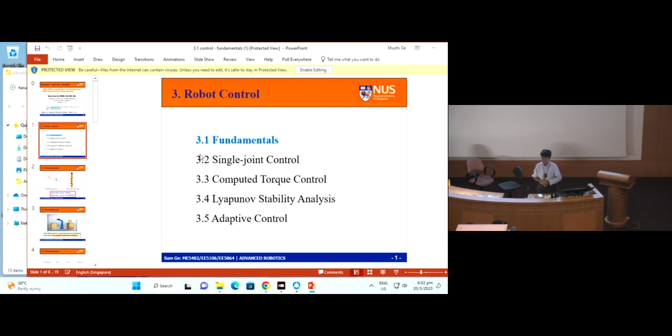Today we shall continue with what we left last week. We will do the control part, robot control. Before we move to control, I want to give you a quick review, a mental refresh for the dynamics part. For dynamics, we did a review for kinematics, then after that we did a Newton-Euler formulation, and subsequently we talked about the Newton-Lagrange formulation. Then we gave you a tutorial. After that, we understand the Newton-Euler and Lagrange formulations are actually quite complicated.

Then we give you the neural network modeling. And now for the control, I give you the fundamentals. Subsequently, we share with you the single joint, which you would imagine would be easier, right? And then we will talk about computed torque, Lyapunov stability analysis, adaptive control method for multiple joints. For the fundamentals, this is the Puma with 6 degree of freedom, and this Kuka with 7 degree of freedom. For the kinematics part, the path planning, which you found quite tedious.

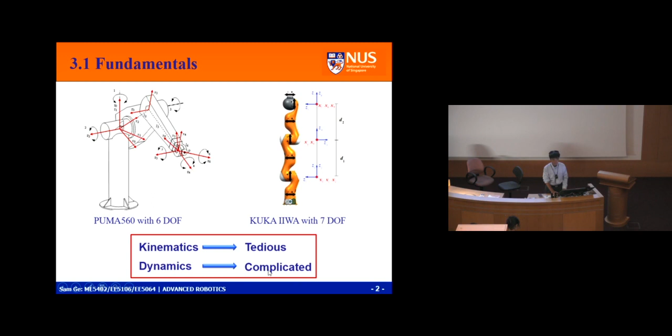The dynamics is actually complicated. We will see how we can actually control with the knowledge of kinematics and dynamics, and how we can control the robot in accordance with certain prescribed performance criteria. You want your system to perform in the way you want it.

You know that ChatGPT is really in fashion now. ChatGPT, some part is very good, some part is unpredictable. So here, for this robot, this is hardware, better be safe. The ChatGPT, if the guy talks nonsense, it still doesn't hurt you, only wastes you some time, but a robot can hurt you.

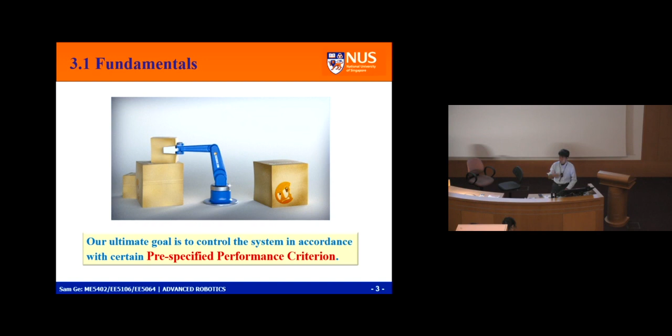So basically, this is the robot, the environment, we have sensors, and then we do the control. Sensors you would have learned in other courses. In the control part, we need to do the control for stability. We also need to do the trajectory planning. Kinematics did some trajectory planning for you, but in the computer, you need to include all these parts.

So in the computer, you basically need to do all this.

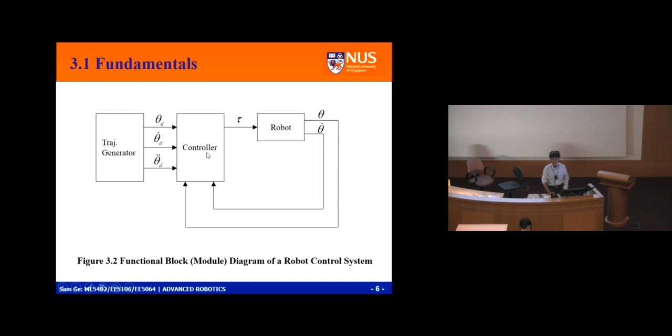I'll share with you the different controls, and then our techniques. This is the robot which gives you the position, velocity, and then with the feedback from the sensor, the controller, based on the trajectory generated theta d, theta d dot, theta d double dot, you can do the control design. When you say controller, you say PID, adaptive, or Lyapunov. In fact, you can enlarge and be more abstract with fuzzy logic, neural network control, and then you can take it as decision making.

Then we talk about stability. I give you first this mass spring system with a damper. We introduce the stability; this is the model.

Hello, I said it's my time to talk. If you continue to talk, better leave the room. Is it my time to talk? Can I talk now? Thank you. I respect you, you better respect me, respect your classmates. When you are talking, your classmates cannot hear me. Can you say sorry? How about you? Thank you.

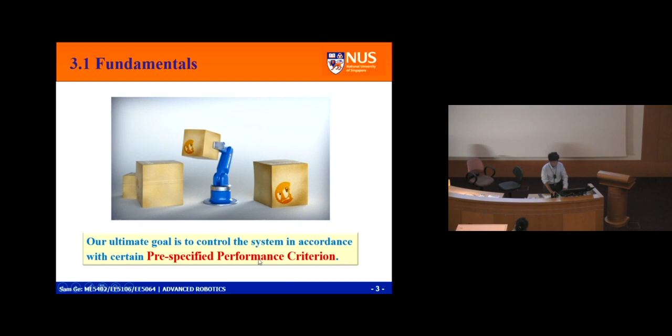The most basic criterion in designing a control system is to ensure that the resulting closed-loop system is stable. I have many people working on control with me, and I said yes, this stability is important. As in a classroom, when I'm talking, I really want a stable environment so that people can really listen to me. But then after stability, my whole purpose is not just for stability; after stable, then we go for performance. I really want you to go shine, unleash your potential, be the product of NUS.

Okay, so earlier I said here is performance; after stability, then you go for performance. Subsequently, here you learn the prerequisite. When a system is given to you as s squared plus a1 s plus a naught equals 0, the poles of the system are given by this, and this is actually an imaginary number, right? Could be, and then so you have this imaginary.

If the pole's solution is on the imaginary axis, the system is oscillatory. Because it doesn't consume or generate energy, it just oscillates. For a mechanical system, think of a mechanical clock vibrating. For electrical, you have an LC circuit, with no resistance. When you add resistance, you have damping, you consume energy, and the system becomes stable. And of course, if you keep pumping energy into it, the system becomes unstable.

If you're really serious about stability, you need to study far more than this, because for this course, I'm only covering it for robots. I just give you the basic definition, okay?

And then for this stability, subsequently for the robot, I want to consider performance, and I include this as my force. I want to control my robot. So this is the force. How do I control it?

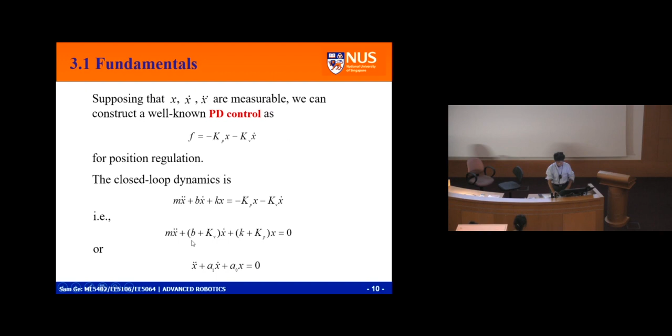For this one, the same idea applies - you convert it to something simple. Here you still use KP, KV, but this is not systematic - it changes, because for different M you need different KV, KP values. But when you come to here, after I design alpha, beta, the system becomes this, and my PID, PD control becomes much simpler.

So this is the system, and then I use alpha, beta to transform the system into a double integrator system. This part becomes this one.

For the ECE students, you know circuits, interfaces and impedance, input-output impedance - you can see this as a circuit. You look at the circuit from this part, then you have F and X dot. Then I add this part of the circuit as a bridge, and I see the circuit as X double dot equals U. For a mechanical system, you can look at it from a system point of view and do the same thing.

We were having dinner and talking. Even though she was in law and I was in engineering, we really had a good evening - we discussed everything and understood each other. Because within an individual domain it becomes domain knowledge, but when you elevate it to a higher level of abstraction, they're all the same. Do you follow me? Okay, good.

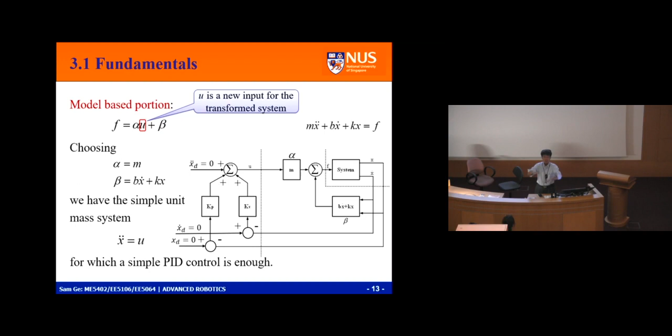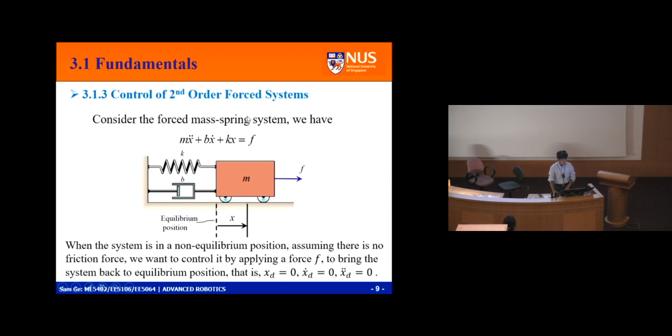So for the system x double dot equals u, I can assume u equals minus kv x dot minus kp x. This you already know, we did PD control earlier. Here, because the system is a unit mass system, my choice of kv, kp would be independent of system parameters.

This is the beauty of PD control, but in life there's no free lunch. Your controller is independent of system parameters, so somewhere it must have used system parameters.

Agree? You are so close to me, you are my buddies, okay? So somewhere it must have used system parameters. Where do we use them?

We use the transformation. This is system parameters, alpha, and also the beta, bx. We hide the complexity inside.

I work with many students - if you are Singaporean kids you learn this too. When you develop software, if you write a sequential long code, you would bury yourself. So theoretically, you need to wrap things up to make it simple.

For a complex system, I use this alpha, beta transformation to hide the complexity. Do you follow me? It becomes a module. Yuxiang, you got it? I hide the complexity because you are doing research with me.

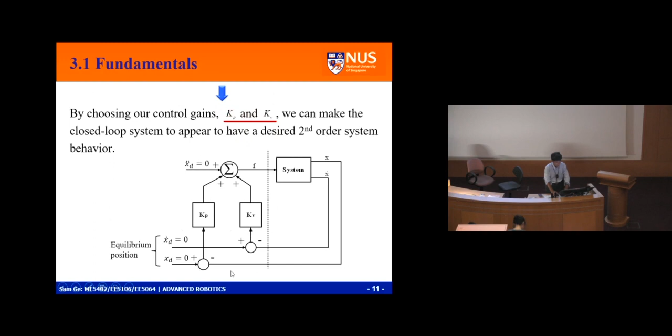For this equation, earlier you used x, now this is E, it's the same. You can still see you've got this part - x, using E, they are the same.

Now the system becomes this. So this is for trajectory tracking - xd dot, xd double dot is now equal to zero. Okay, and this is trajectory control.

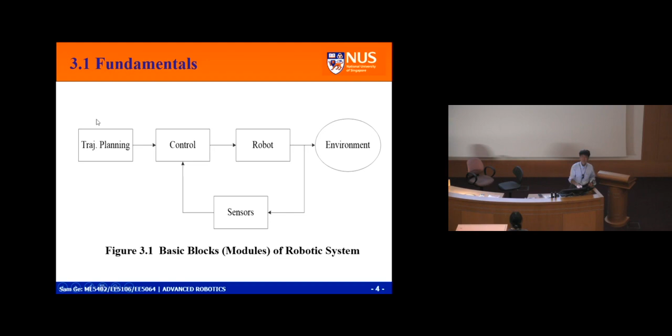That's why earlier I was saying for computer control, you need to include these two parts in your computer. This part is from me, this part is from Chu Chi Kang. So this part will all be digital computing, okay.

And then another one, disturbance rejection. Just now, I was teaching, my two friends were talking about disturbances. I'm sorry I use a bit strict language, okay? But then, thank you for your understanding.

You see this is the system. You have disturbances, and for your system you want to be stable, but in life you cannot be so stable, you must have disturbances. Actually I constantly disturb my students, and you move around, running around. As long as they get the job done, physically they must be healthy. So I really appreciate my students agree with me, moving around, they become more healthy.

Now, this one actually, the disturbance cannot be too big. If you have an earthquake, sorry, the earthquake is too big. The aircraft flying, but if you have a big storm, the aircraft cannot, okay?

So that's why when I'm talking, you can talk, really I cannot hear. I'm okay with you. But when your volume is too big, then disturbance, so your disturbance must be less than alpha. In the alpha, I cannot hear, your close friend can hear. I'm actually quite naughty as well.

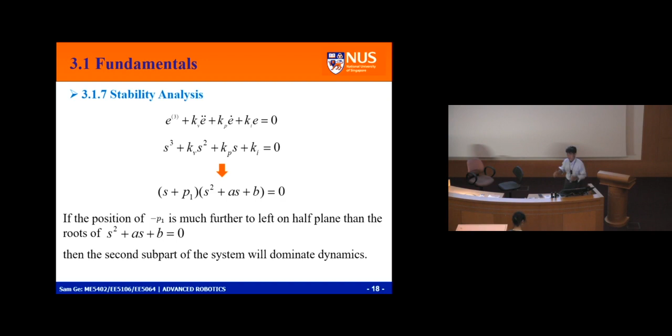One thing you're helping me with - the computing we taught in the old days needs to be revolutionized now. The textbook was written 10 or 20 years ago, based on when computing power was limited. Nowadays with so much computing power, if you go for performance, you don't care about reduced order. If your budget is limited, you can only afford a smaller system, then we do it the old way.

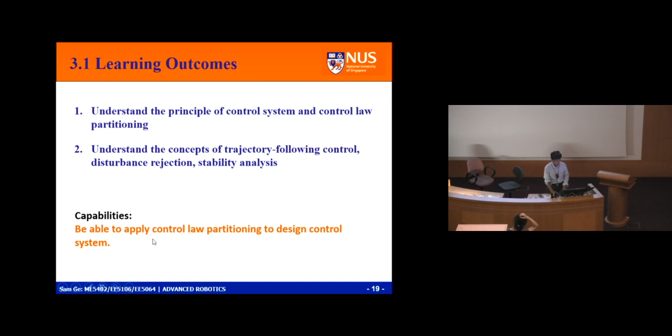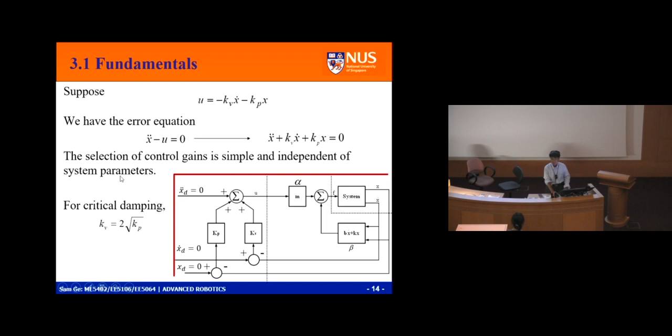The learning outcome: understand the principle of control system and control law partitioning, and understand the concept of trajectory following control, disturbance rejection, and stability analysis. I want you to apply control law partitioning to design control systems, because it's very systematic. After this transformation, the closed-loop performance is independent of the system parameters. And I also showed you the stability analysis is simple.

So, questions? Any question? No question? Any question? That means either you understand very well or I explained well, right? So we are all doing good, right? Okay, good.

So this is the first - the fundamentals. Let's do the single joint. After preparing the fundamentals, PD control, controller partitioning, now we do the single joint.

The single joint - each joint is controlled by a motor. Many industrial robots use DC direct current torque motors, which consist of stator, rotor, and armature. This is our high school stuff, right? When I teach some students with computing backgrounds who have a problem, I need to show them this. Glad we are all EE or ME, we all understand this, okay?

Here is basically the north and south poles, and this is electric current. Then force would be generated, and the motor would start to turn. Generally the relationship between current and torque produced is tau equals KM times IA. The bigger the current, the bigger the torque.

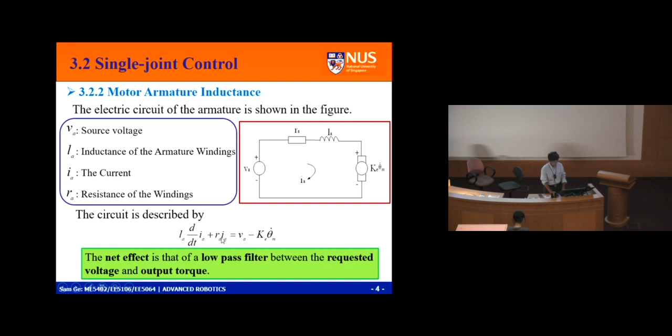The net effect is a low-pass filter between the requested voltage and the output torque. Output torque is Tm equals Km times IA, so you convert into tau-m and find the corresponding low-pass filter. Assume the motor inductance is negligible - the inductance here is very small, so I can neglect it, neglect this dynamics part.

So the system would be VA equals this term plus this term - I have this equation. And since tau-m equals Km times IA, then IA equals Tm over Km. This one you can take as the pure torque source.

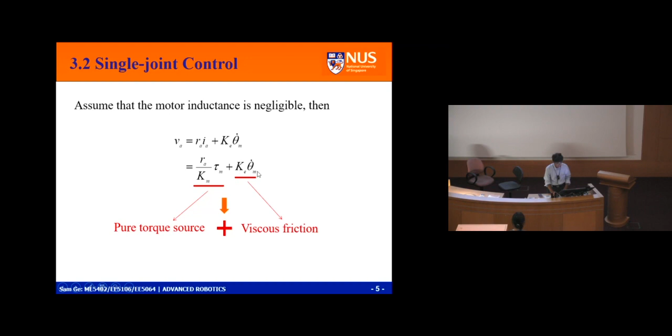Here you can have viscous friction, and this is back EMF. But mechanically we know the viscous friction - this part you can lump up with the friction together. Then comes this part: this is the motor, after the circuit drives the motor, it's connected to a gearbox, and the gearbox drives the load.

The motor turns at high speed, but the load moves at low speed, right? A small motor turns at high speed, and after the gearbox the force is amplified, so it can push a heavy load. You all drive, right?

Your bicycle - you can change gears. Going to a mountain, you change to a lower gear. If you're driving and picking up speed, you use a lower gear, right? And if you drive automatic cars on a flat road versus going to the mountains, you need to change to a different gear.

Do you follow me? Okay, good.

I is the load inertia, IM is the rotor inertia. This is the gearbox, the gear ratio: theta m dot over theta dot equals eta. This is usually larger than 1, in the range of 100, okay? This is in the range 75 to 100, and then this is tau m.

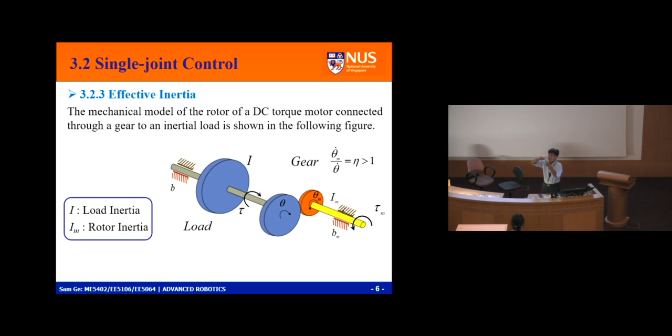If eta equals 1, you don't have the gearbox, and then this is a direct drive robot. Direct drive robot, when you don't have the gearbox, the gearbox actually, when the gear has too high a ratio, the teeth of the gear become flexible. Do you follow me? Become flexible. Then this part they call the flexible joint robot.

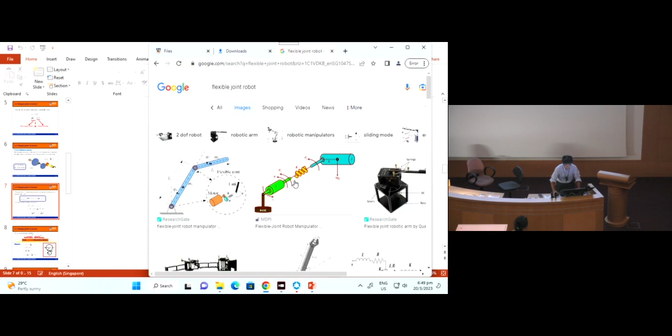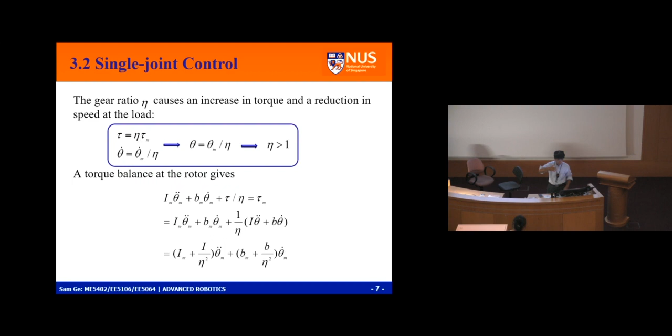But then to control that kind of robot, if you really want the best performance, if the frequency is low, then you don't excite the spring. But if you need high performance, then the spring needs to be overcome, and you need a more complete control method, okay? Professor Mark Spong and many others did control methods, and you can drive over the spring.

And if you don't have a gearbox, they call it a direct drive robot, then the robot can really move at high speed. When I was at Imperial College, my supervisor was very rich. He drives a Rolls Royce, and the president of South Korea visited my supervisor as well. He was designing direct drive robots for manufacturing, chip manufacturing actually, because it's very accurate, okay?

If you use a gearbox, it's not accurate. So that's why I know the direct drive robot, I was playing with that drive robot. That motor at that time, I think China could not buy.

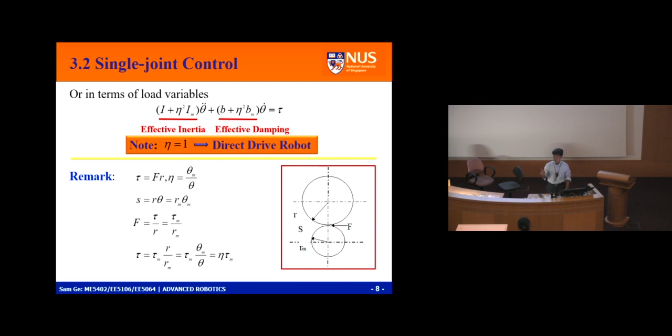It's a control item. But recently I went to China, and I found many companies can already produce that motor, okay? These direct drive motors, I found. I think in 2010 China still could not produce them. By 2018, I found many companies, not just one, could produce them. That's why many robots are produced in China now, all over the places, okay?

Okay, good. To ensure the motion of a robot link is never undamped - when undamped you have oscillation, right? - the value for I should be the maximum value, I max. This choice will result in a system that is either critically damped, zeta equals 1, or over damped. So the system may move slow, but doesn't oscillate, okay?

Okay, the system is modeled under the assumption of rigid linkages. In reality, every element has finite stiffness. However, if the system is sufficiently stiff, natural frequency of unmodeled resonance is very high and can be neglected compared to the influence of the dominant second order poles that we have modeled.

Earlier I said the system you assume as a second order, right? Then the unmodeled dynamics, you don't excite it, so you are okay. Do you follow me? You don't excite the spring or higher order dynamics if your natural frequency is low. A rule of thumb: if the lowest structural resonance is omega res, then we must limit the closed loop natural frequency according to omega less than half of the structural resonance. Then you don't excite it, okay?

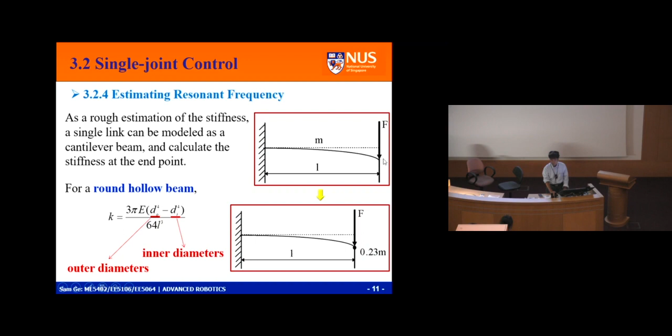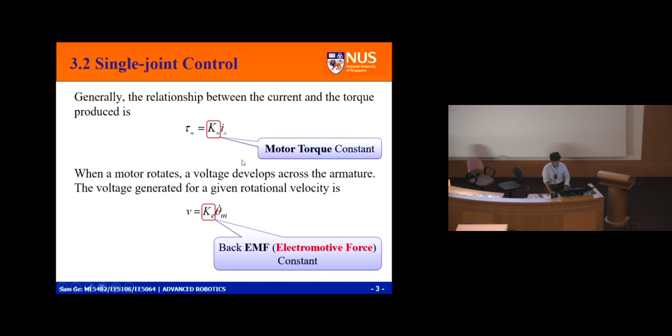And then now the control of a single joint. So we have done our model, right? From the motors, the beams, gear from the motors, the circuit, the beam, the gearbox, and then the approximate beams — we obtained the models already.

To obtain the model, we usually make the following assumptions: the motor inductance can be neglected, the motor is a pure torque source, and taking into account the higher gear ratio, you have the equivalent inertia, and the structural flexibility is neglected because your control servo loop gain is below the natural resonant frequency.

Okay, and then we obtain this dynamic model: I max plus eta squared Im times theta double dot plus b plus eta squared bm theta dot equals tau. And then how do we design the control system for this? You say, Sam, this is easy — this is controller partitioning, right? Yes, good idea. Because of this, the control design is carried out.

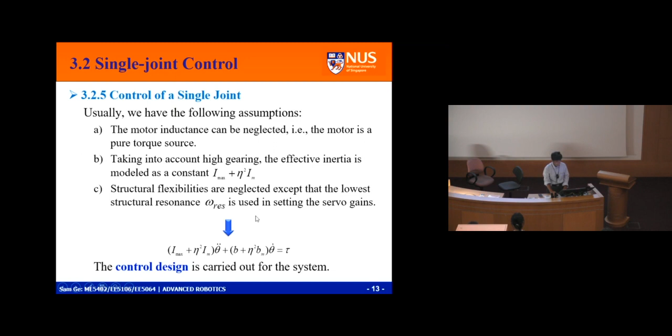So now we say control of a single joint. After we have the model, then we do control. Then for the control, this is the model. We do controller partitioning: we found alpha equals this M, beta equals the whole lot. Then U equals theta D double dot plus KP times E.

Then I found my closed loop error equation. Then KV equals 2 square root KP, and KP equals omega n squared, a quarter of the resonance frequency squared. Then I design my closed loop stability. Happy?

The learning outcome is to understand the purpose and method of single joint control, and know the rule of thumb in the limits of closed loop natural frequency. Basically, this must be less than half of the structural resonance frequency, and be able to apply controller partitioning for single joint control in a simple system.

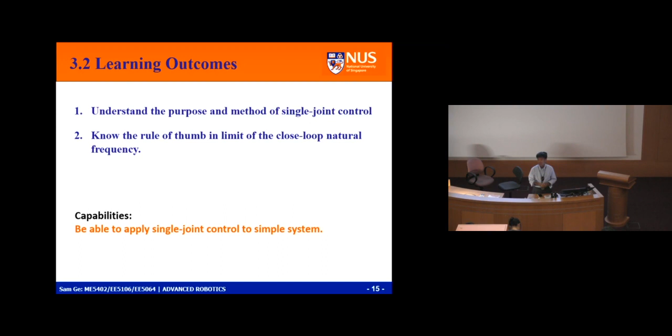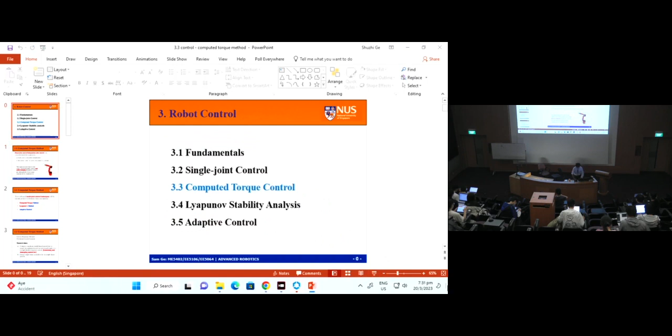For the dynamic part, we go from complex to medium complex to simple. For control, I do the other way — I go from simple to complex, okay? Then your brain gets used to handling either complex to simple, or simple to complex, or medium all the way. I can handle it all, okay? And you must get your brain fully excited.

I was talking to Wenxin and Yuxiang during the break because they are my PhD research fellows, and we need to talk and arrange a lot of stuff. I said, when you are doing research or study, or when you have something you love, like a cat or a dog — when you think about something, you cannot keep thinking day and night, or you'll burn the neurons in your brain. Do you follow me? If you don't work, your neurons disconnect and you don't learn. But if you keep learning without sleep, without enough power, the connection is lost. With enough power, you stay connected and keep learning, otherwise that part could be burned. Do you follow me?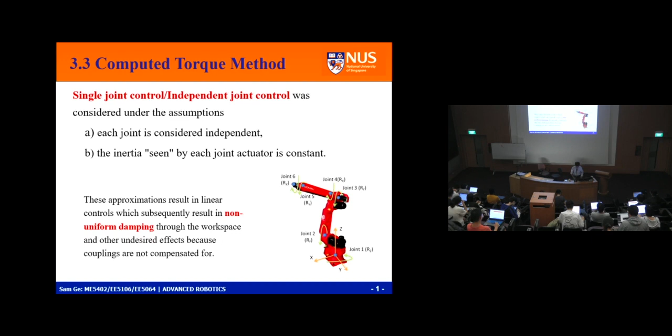So then you say, Sam, what if I compensate for the coupling? Then the performance would get better, right? Okay, let's do decoupling. Three advanced multi-joint control techniques will be introduced here to eliminate these assumptions.

I will share with you three: computed torque method, Lyapunov method, and adaptive control. You see how the file is organized: this 3.3 is computed torque, and then another two files would be Lyapunov and adaptive control.

This adaptive control, I would put a neural network here as well, because neural network structures - the deep learning needs to work with my adaptive control to improve the performance. Deep learning in the control community is called offline training, and then there's online training.

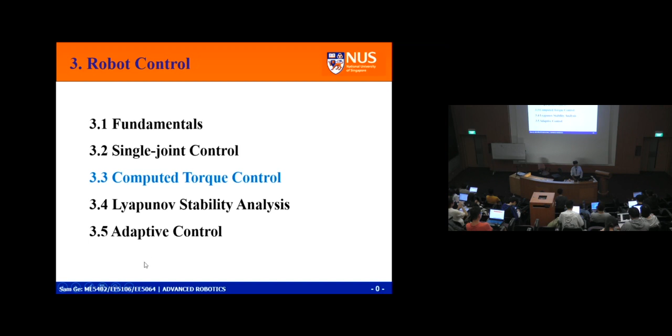So I shared with you controller partitioning. This controller partitioning is basically the beginning of the computed torque method. This is also called the inverse dynamics method or partitioned control scheme. I put the idea all together here, so when you read in the literature, you won't be confused by the name.

You see the content - because the ideas are developed from different fields. In control, we have electrical engineering control, mechanical control, chemical control, right? Now material science would have control soon too. Control is going to material science.

So they mean the same thing. The general idea is to compute a nonlinear model-based control law to cancel the nonlinearity of the system and render it - transform - you see GPT, right? Chat GPT - GPT means generative pre-trained transformer. This is transform. You can see rendering, I say transform, okay? So transform it to a simple double integrator system.

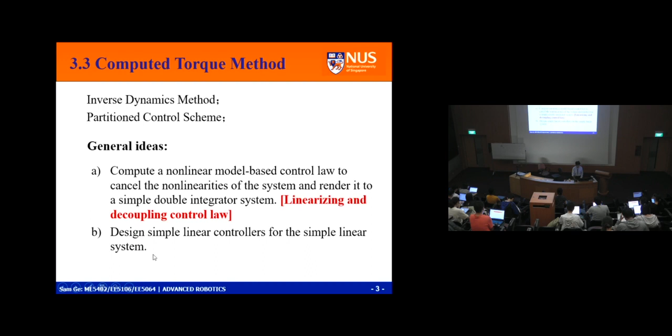So then after you have done that, you design a simple linear controller for a simple linear system. For linear systems, we have plenty of tools to handle, okay?

So for any n-degree-of-freedom robot, the dynamics are described by D q double-dot plus C q-dot plus F(q) plus G equals tau. D q double-dot is the inertia term, C is the Coriolis and centripetal forces, F is the friction, and G is the gravitational term.

So you basically have a complete system. And then you can define H - you lump the whole lot and put it here. So the equation, you can write as D q double-dot plus H equals tau.

And then for this one, to do control system design from the controller partitioning, I think you should have some idea now. So what you do, from the most intuitive control design scheme in the computed torque method, is you define tau equals alpha U plus beta, and you choose alpha and beta such that when you substitute tau into here, the system becomes Q double-dot equals U.

Do you follow me? You compare the two equations and you would find alpha equals D, beta equals H. Then you achieved this. This is the same as we did for the controller partitioning.

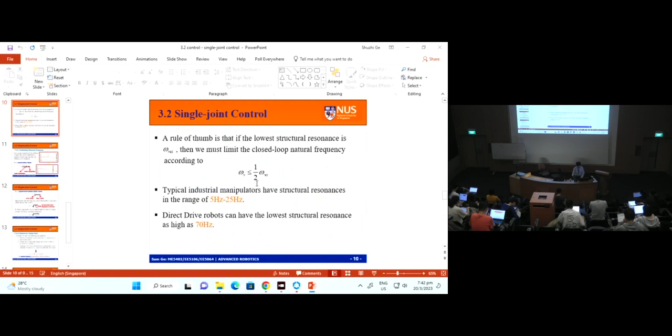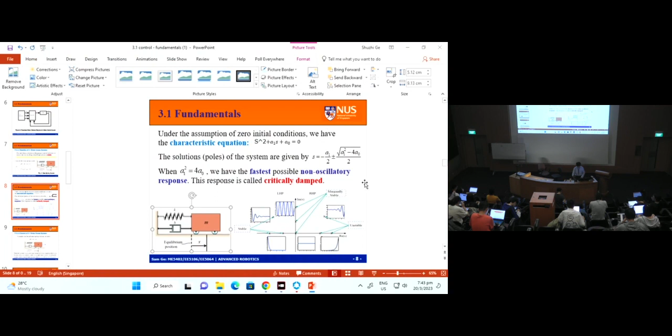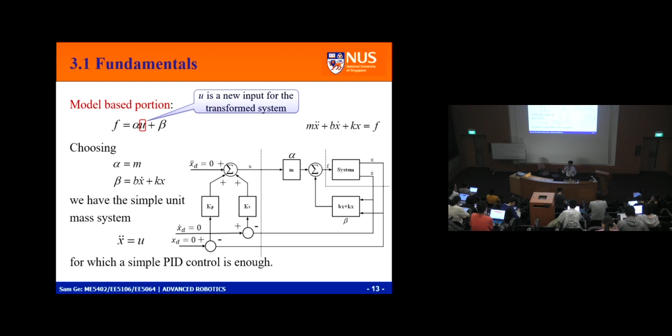We do the alpha beta here, and for the X, this is single joint, and for the fundamentals we also did the alpha beta. This is also alpha beta. So I've repeated alpha beta at least 3 times now. This is the fundamentals, the alpha beta transform, and single joint.

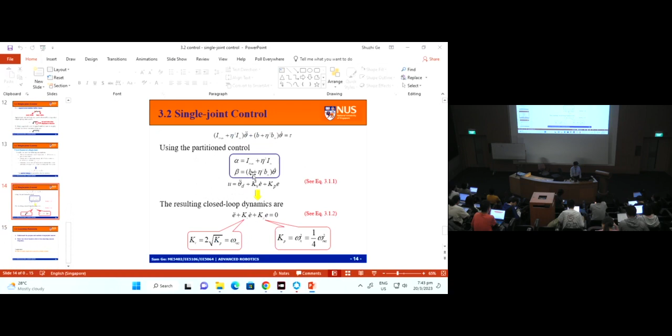Single joint, I did one alpha beta, and then for the multiple joint case, I have the alpha beta. This is easier now since I've repeated it 3 times. It should be a habit - I'm pushing my students to build up a good habit.

For your body to remember, how many days does it take for a habit to be built? Your body knows it - how many days? Wow, good. How do you know that? Did you read it somewhere, or did you practice?

If you know the theory, you try to see whether it works or not. When I show you the theory, you try it and see if it works. Nowadays I give the theory to myself and my students - some accept it well and it works for them, others reject it and say it's nonsense, then of course I don't work with them. So if you believe in it, you try it, okay.

So now does alpha beta work for you? How can we choose alpha and beta? They are system parameters - the system is D, H. This is our robot design, we know it. D, you know, during the robot dynamic modeling, D is designed. The robot weight, the length, we know it. Especially with the CAD CAM for this robot design, we can compute it.

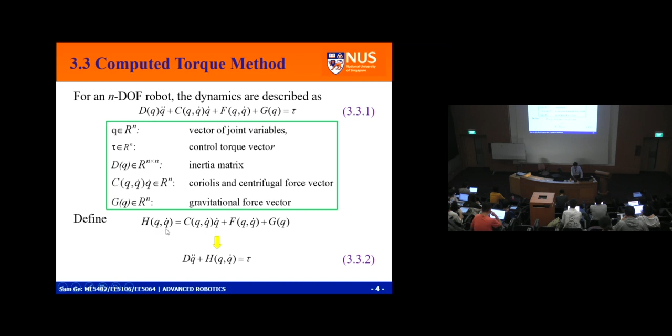Now, if D and H are known, then everything is beautiful, right? In a known world, everything is beautiful. So for the time being, we know everything, okay? Now, if we know everything, this is beautiful, right?

Sometimes I see my engineering students always think, not happy. But I found my mathematician friends, they are happy every day. Because to them, every parameter is known, every example they can show. But for our engineers, the weight is unknown, the true value I don't know, I have measurement noise, I have disturbances. But for the mathematician, the world is so beautiful, they can describe it beautifully. So I hope we assume yes, everything is known. At least we are happy first, okay?

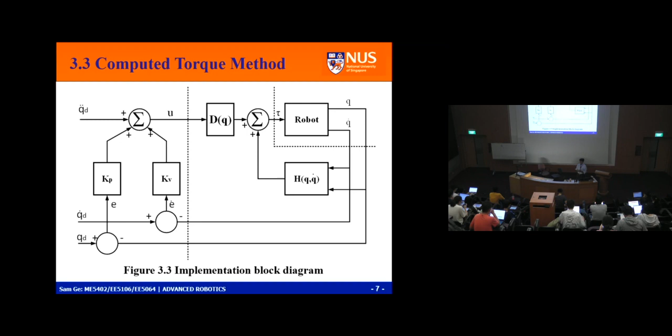Okay, good. I see you are happy, right? Okay, good.

And then I make a few remarks. The ideal performance represented by this is unattainable in practice due to many reasons. One, the most important being inaccuracy in the manipulator model. Then, discrete nature of digital computer implementation as opposed to the ideal continuous time controller. And also, third, disturbances. But at least we must get started from somewhere.

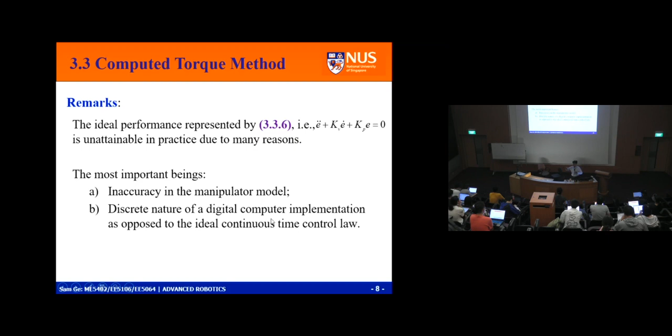So if the model is accurate, computing is continuous, and no disturbances, this is good, right? Then we start to handle how to handle this. How to handle inaccuracy in the models, how to handle the computer implementation, then we push our limit. Is that okay? Okay, good.

Present industrial robot control systems, because the problem is having a good knowledge of the dynamic models, there is a trade-off between complicated model-based control and simple PID control. And many industrial robots still have tau equals Q D-dot-dot plus K_V E-dot plus K_P E plus K_I integral E dt, okay, simple independent joint PID control. Many industrial robots still doing this, and it works.

Why does it work? Because people thought PID: P is proportional, derivative introduces damping, integral does the historical understanding, right? And so it works. And then come to complexity, for the complex nonlinear system, why it works, linear system cannot explain.

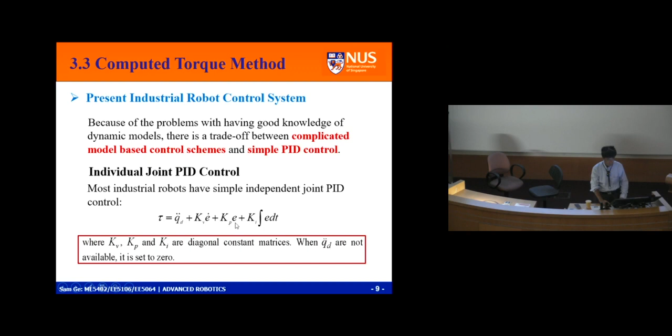Later, when I introduce Lyapunov design, you will say PID indeed works. So in the linear dynamics theory, even though this is linear control, for a nonlinear system, we really don't know how to explain it, okay? In the linear world, I can only say proportional, derivative introduces damping, K_P proportional. Hopefully it works, unless you use linear synthesis methods, the pole placement, or LQR, or H infinity.

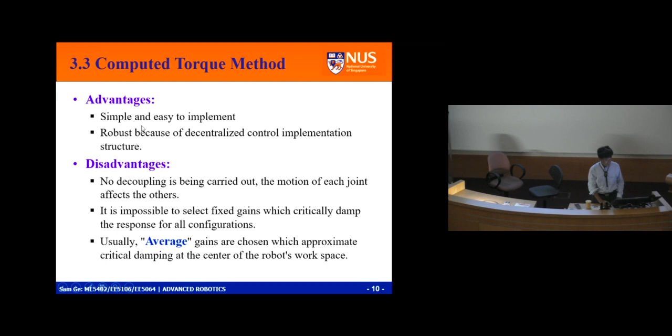Unless you invoke those things, but still, because we are controlling a nonlinear system, we simply want to handle the nonlinear directly. The advantage: simple and easy to implement, robust because of decentralized control implementation. Disadvantage: no decoupling is being carried out. The motion of each joint affects the others. You have the joints, this motion affects this one, and then this motion affects the other two, okay?

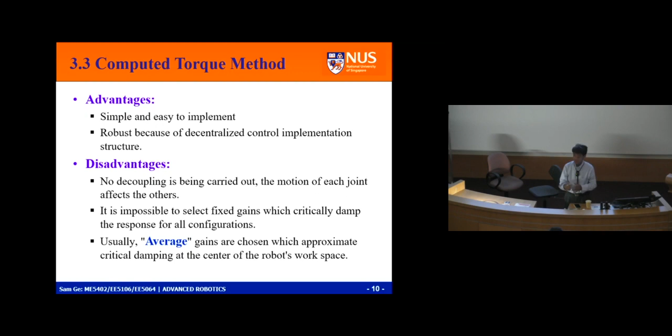And it's impossible to select a fixed gain which critically damp the response for all configurations, because the configuration, the equivalent inertia does change, okay? Usually average gains are chosen, which approximately critically dampen the center of the robotic workspace. And all these engineers are smart. If this is the workspace, the robot most of the time is concentrated working here, so they put the gain here, optimally tuned. In the other part, if you have any shaky movements or errors, it doesn't affect much, but this part is properly tuned, okay?

And the additional gravity term: since the gravity term tends to cause static positioning errors, some robot manufacturers include a gravitational model G of q in the control law. So they add this part, and this is approximate, not the true one, because the manufacturer knows the robot's weight, but the robot is going to pick up stuff, then that weight would change, right? So the control is not decentralized in nature because you need communication between the different joints.

The architecture of the control must allow communication between joint control to make use of central processor. As I said earlier, nowadays computer is cheap, sensor is cheap. You can really push to the limit.

But if you have a limited budget and still want your robot working, okay? There are many robots that are cheap, because the customer only considers how much they pay, not whether the robot works perfectly. So the engineer still needs to cut costs down. That's why I also introduce the cheaper controller. For your research, if you have loads of money, you push for performance. But if you have limited money, you push for cost effectiveness.

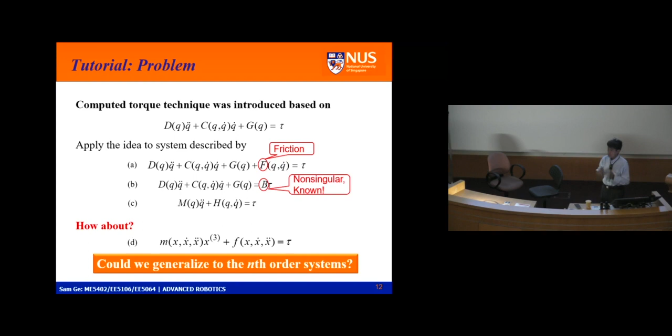But actually nowadays there are too many different types of robots: fish, flying robots, soft robotics, mature robotics, all comes in. So I teach you simple robotic manipulator control, but the robot actually comes in many different forms.

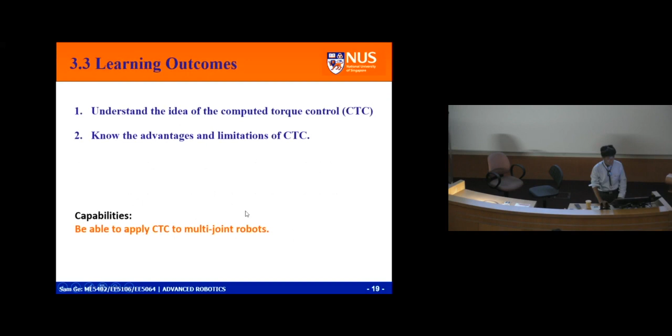So this is the tutorial problem. I have solutions, but I think I'll stop here for you to think, and I'll discuss with you next week. Is that okay for the tutorial?

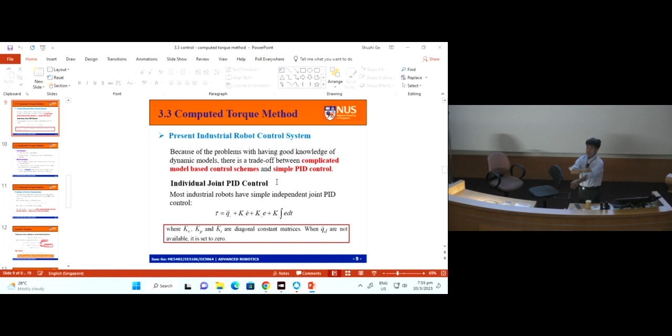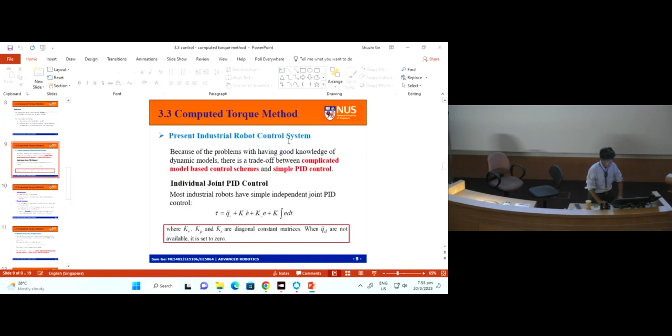Later you need to go aside because you need to absorb something. If I keep going, you start to see too much information. When you have dishes or food, you need veggie, meat, bread, or a mix. So I give you the theory already. You see the tutorials, all these questions, and then you put it into the back end. Let your brain do the back end computing.

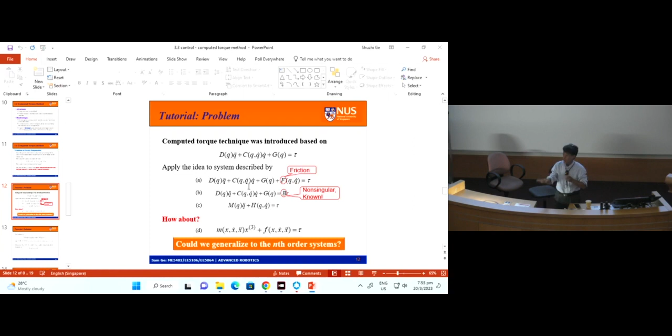You can think, and at the same time see what I'm going to teach as another concept. If the two concepts are not correlated, you can learn things simultaneously. If they are correlated, you get confused. You always go back to, just now I was talking to you, you said I'm still thinking, how do you get your H, how do you get your D? I said we assume they are all known, then your problem is solved. When H and D are unknown, then we move along to see how to solve it.

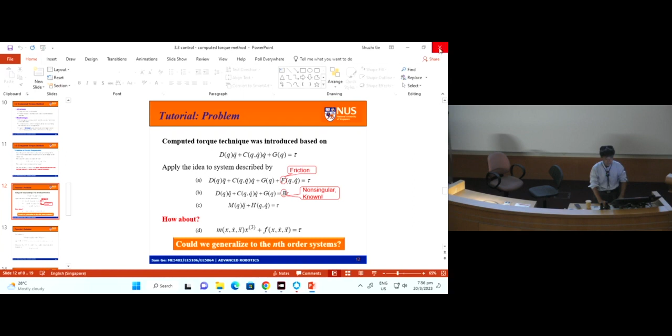So you use the computed torque method, you see how you can handle this. Then move on to the next one.

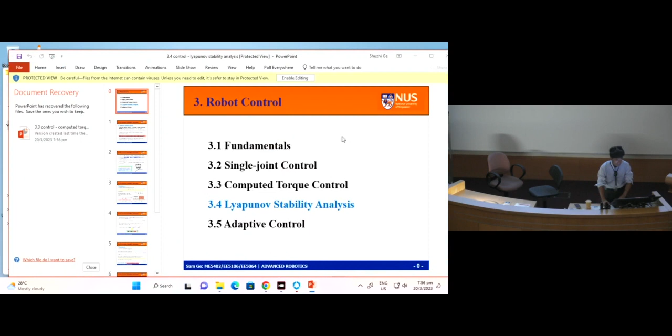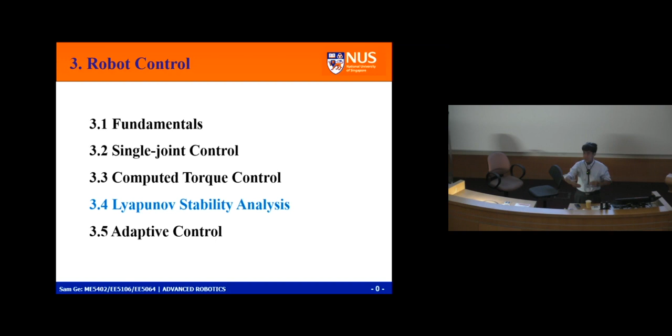Okay, for PID control, I said how do I prove stability? I really had no clue how to do it, because when you linearize the nonlinear robot and use PID, you change the problem. But I can show you that PID can be proven stable by using Lyapunov theory. This is Lyapunov stability analysis, or Lyapunov's second method, or Lyapunov's direct method.

Named after a Russian mathematician in the 19th century, concerned with determining the stability of differential equations. You've all taken feedback control already, right? For linear systems, we can basically find the solution and express it analytically. Then Lyapunov asked, what if you have a nonlinear system equation and cannot solve for the solution? How do you know if the system is stable or not?

Give me a linear system, I can find the solution. I can show you which component diverges, which component converges. But then with a nonlinear system, how do you solve it? So he basically tried to answer this question without solving the differential equation governing the system.

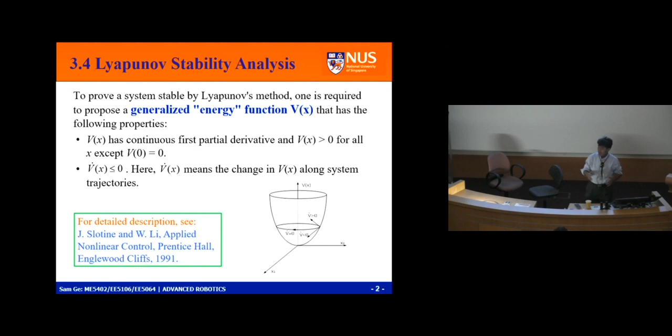I always stay here, okay? However I'm perturbed, whatever you push me with, or uncertainty, I'm always here. And then the system will always lose energy. And when it comes to rest, x dot equals 0. X dot equals 0 does not mean that x equals 0, okay?

So then, whether x equals 0 or not, we try to see the system. If x dot equals 0, that means x double dot also equals 0. You take its derivative: x dot equals 0, then x double dot equals 0, I have kx equals 0. Kx equals 0, if k is a constant, non-zero, then I have x equals 0. Then the system is stable.

You see, for the stability of this system, I never talk about poles or zeros. I never talk about solved solutions. You compare with the Lyapunov equation and the linear system, you can relate to Newton-Euler formulation and Lagrange-Euler formulation. Lagrange, I take the system as a whole, I get the equation. Newton-Euler, one by one, okay? You can compare with that.

Your brain, you can do the abstraction, okay? Happy? You see, I don't bother to solve the equation anymore.

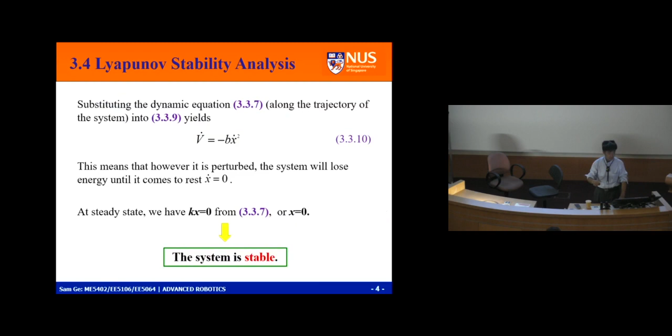And then, do you still remember D dot minus 2C is skew symmetric? Do you still remember? Hello girl, I see you are quiet. You are close to me. Do you still remember? D dot minus 2C is skew symmetric. Do you still remember? Your friend has a good habit, 21 days, okay? You talk to her, 21 day habit, okay.

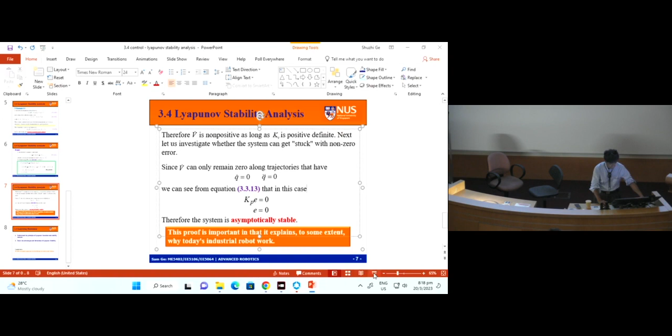Next, let's investigate whether the system can get stuck with non-zero error. We can only remain stuck along a trajectory where Q dot equals 0 and Q dot dot equals 0, because V would keep reducing until it reaches a point where Q dot equals 0. When Q dot equals 0, you also have Q dot dot equals 0.

Then you substitute into the equation. If Q dot dot and Q dot equal 0, all these elements would equal 0. You're left with minus Kp E equals 0, so Kp E equals 0. But Kp is constant and non-zero, so E must equal 0. Therefore, the system is asymptotically stable.

So the proof is important, explaining to some extent why today's robots work. Here the controller is a PD control plus gravitational compensation. Last lecture I said why PID works but I couldn't explain it. Now I can explain why PID works.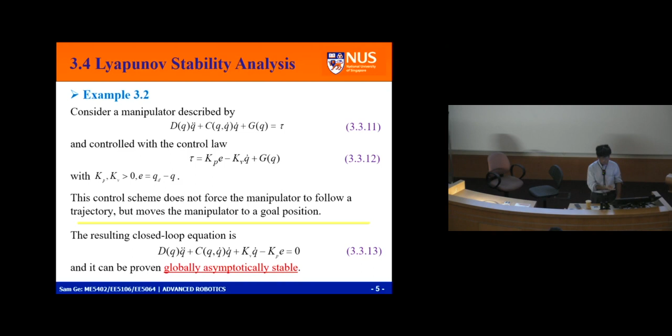Yes? Agree? Thank you. Wow, you are my buddy. You really agree with me. Oh, you got a strong arm. Good.

So you understand the principle of Lyapunov functions and stability analysis. You also know the advantage and limitation of Lyapunov stability, and are able to apply Lyapunov control design to multi-joint robots. The advantage is you don't need to solve the equation. The disadvantage is you don't know the performance. Do you follow me?

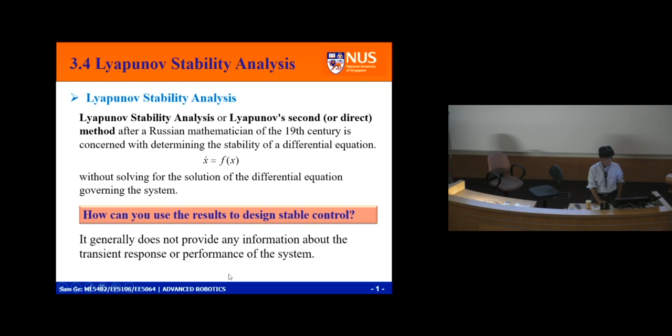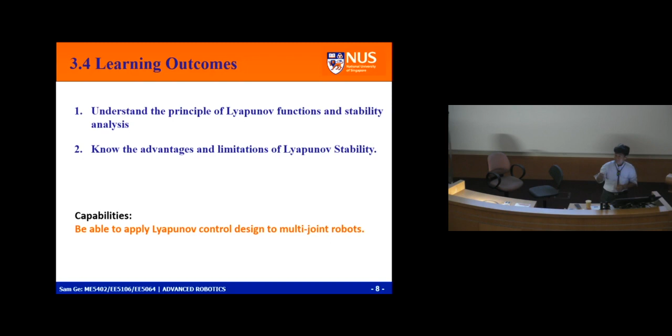Another thing I want to highlight - I want to ask your theory. How do you design the Lyapunov function so that it works wonders? How? Anybody got ChatGPT? You Google - sorry, you're not a Google anymore. Chat, how do I find the Lyapunov function for stability analysis? I really wonder what GPT comes up with.

Okay, anybody got ChatGPT on your computer now? You can check. So now my question to you - how can I come up with a Lyapunov function? I know the system is stable. How?

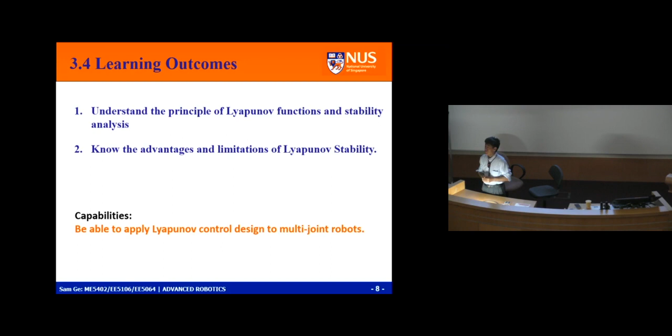Hello, girl, you're also a friend. Don't get scared, we discuss together, okay? So how can we choose - what kind of function do we choose? We know the system would give me good result. You see, I started with...

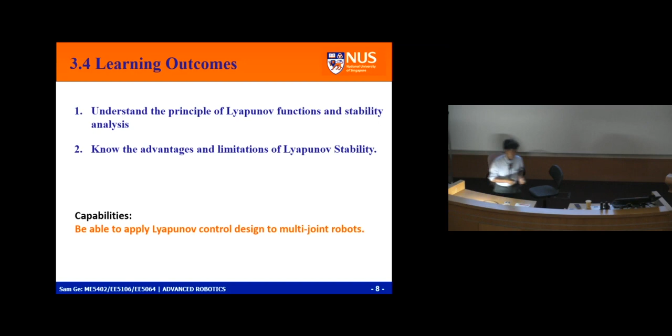Energy of the system, right? Here is the energy of the system. I include artificial energy of the system. Then you start to see you must have an energy form, right? Then I can have physical energy of the system, and artificial energy of the system. Those at least give you a hint, right? Agree? You follow me?

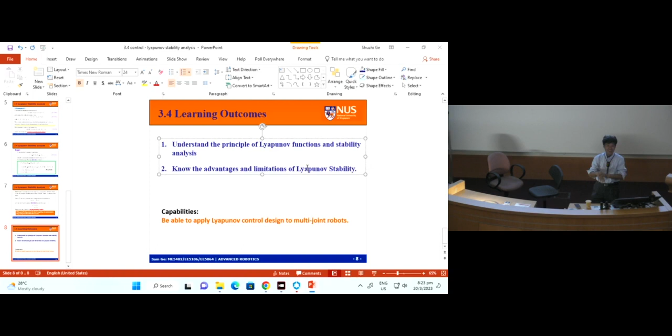Try to follow is okay. So then I give you this question - I also left you some tutorials. You think, okay, now we need to go deeper thinking. Deep learning, deeper thinking. You can also ask deep ChatGPT - you ask him a simple question, he gives you a simple answer. You ask him a deeper question, he gives you a deep answer. You ask a very deep question, he gives a very deep answer. I tried it, it really helps you grow.

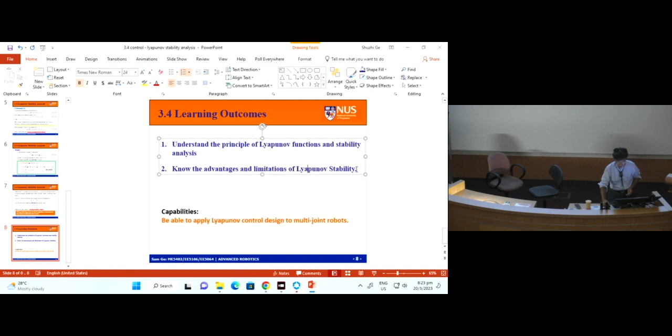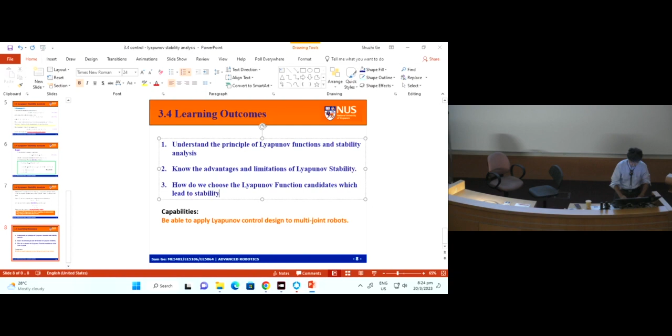So I start to give you how do we choose the Lyapunov function candidates which leads to stability. This is a good question, right? If I never gave you an earlier break, I give you this question, I can let you go off 5 minutes earlier.

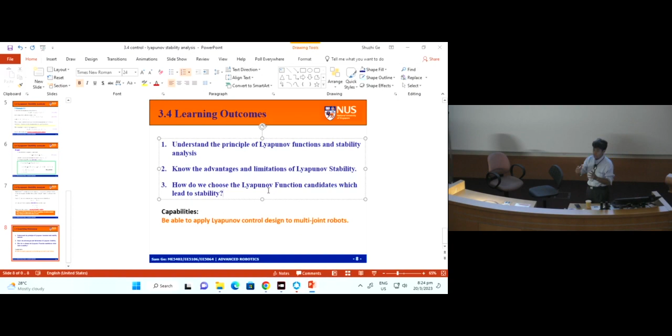I remember last time when I was teaching, once I did this, I still had time. So with this question, I can let you go. And my answer is, before you go - you choose these energy parts, it only gives you the hint. Energy of the system or virtual energy of the system.

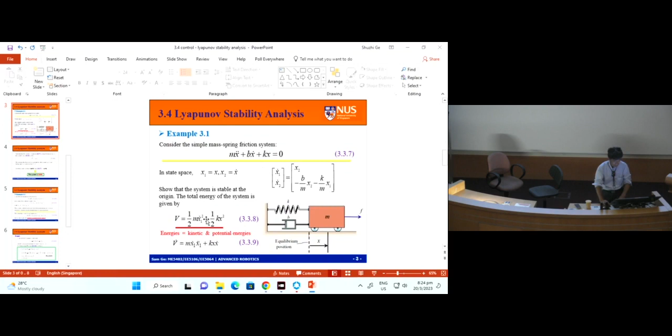Only when you prove that V dot is less than 0, then you succeed. If we did not find V dot less than 0, then you failed - but that does not mean the system is not stable. Do you follow me? Because this approach is a sufficient approach. If you found it, jolly good. If you did not find it, you cannot conclude the system is not stable. You keep trying. Then you really need to work really hard.